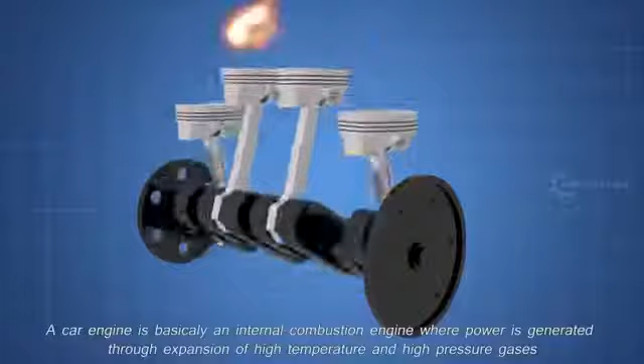A car engine is basically an internal combustion engine where power is generated through expansion of high temperature and high pressure gases. A lot of heat is generated due to the combustion gas and friction of mechanical parts. For sustained operation, this excess heat should be removed from the engine and kept at operating temperature.

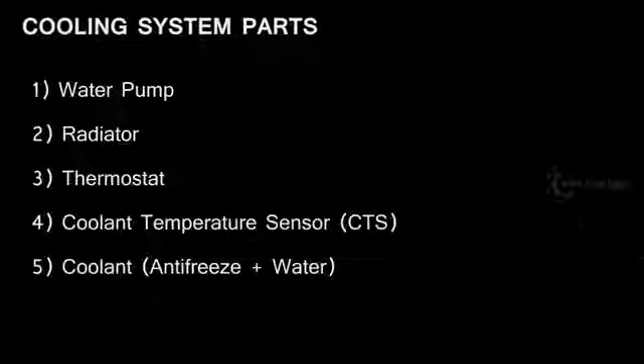Now let's see the parts involved in cooling the engine. The main parts for cooling the engine are water pump, radiator, thermostat, coolant temperature sensor, and coolant.

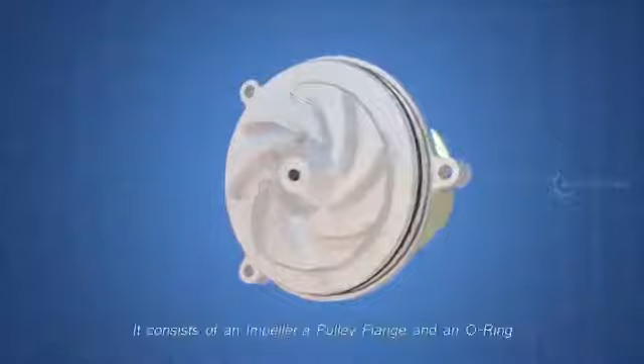First, the water pump. The water pump is the heart of the cooling system, which pumps the coolant. It consists of an impeller, a pulley flange, and an O-ring. The impeller is driven by the engine drive belt through a pulley.

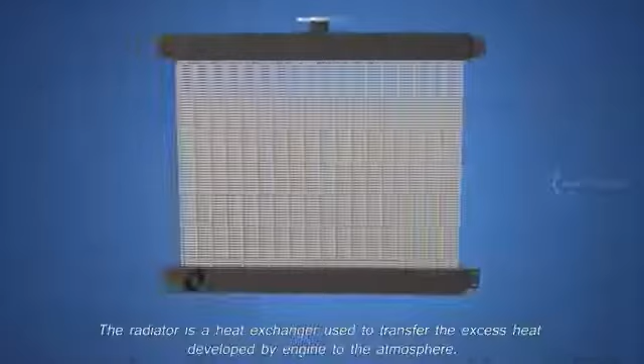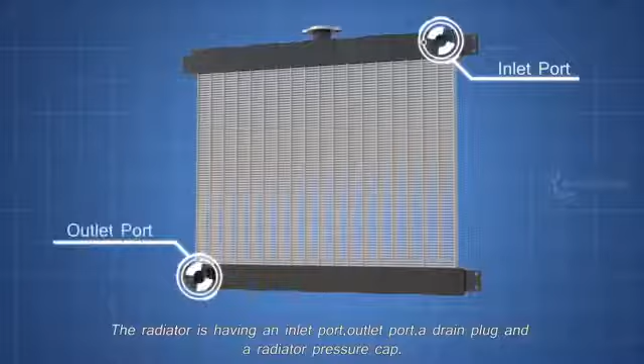Next, the radiator. The radiator is a heat exchanger used to transfer the excess heat developed by the engine to the atmosphere. The radiator has an inlet port, outlet port, a drain plug, and a radiator pressure cap. The radiator pressure cap plays a vital role in the cooling system, which will be explained later.

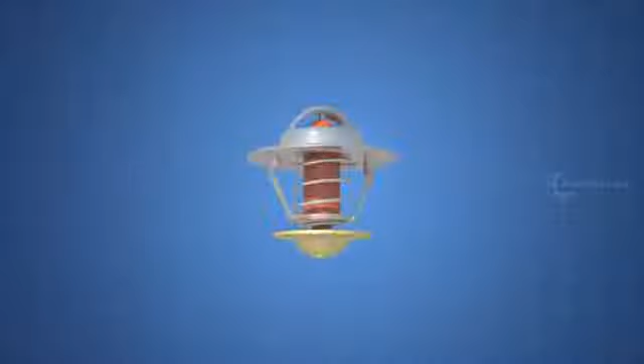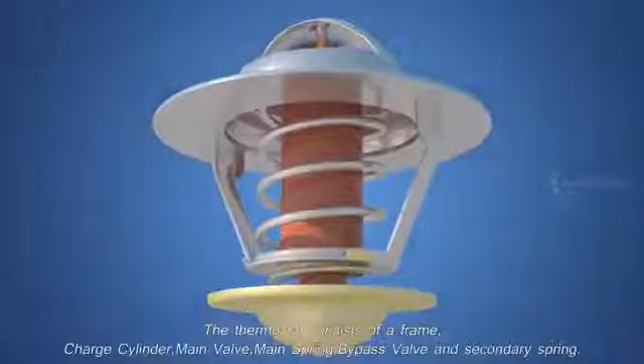Next, the thermostat. The thermostat is a valve which regulates the flow of the coolant and helps maintain the proper operating temperature for the engine. The thermostat consists of a frame, charge cylinder, main valve, main spring, bypass valve, and secondary spring.

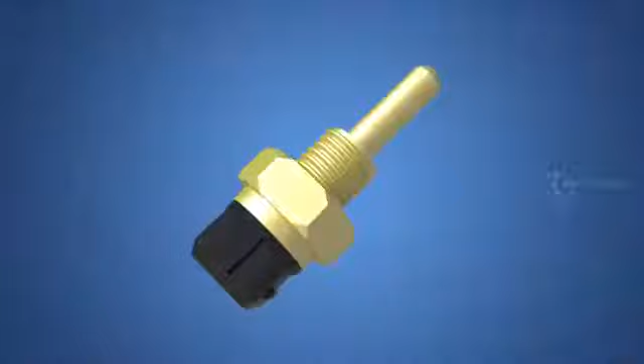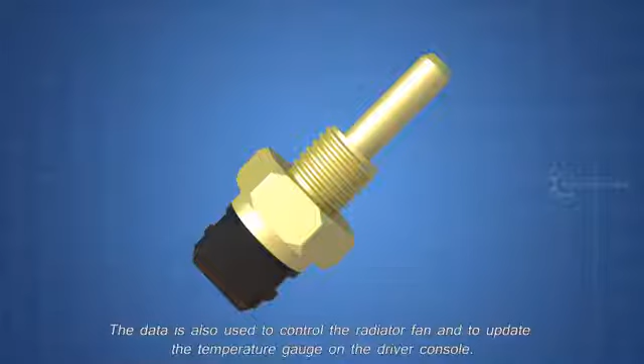Next, the coolant temperature sensor. The coolant temperature sensor is used to monitor the engine temperature. The ECU uses this data to manage fuel injection and ignition timing. Some engines have more than one coolant temperature sensor. The data is also used to control the radiator fan and to update the temperature gauge on the driver console.

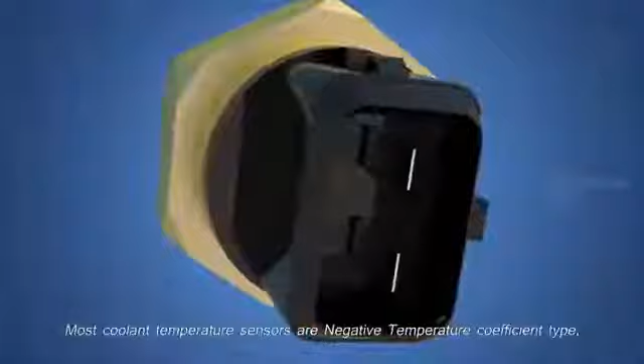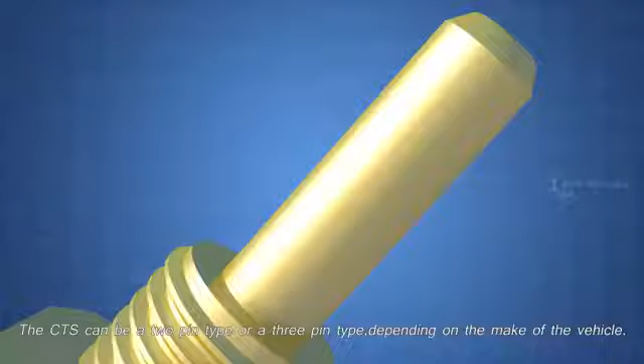The coolant temperature sensor consists of a sensing probe and an electrical connector. Most coolant temperature sensors are negative temperature coefficient type, meaning as temperature increases, resistance decreases. The CTS can be a 2-pin type or a 3-pin type, depending on the make of the vehicle.

These are the main parts involved in an engine cooling system. Now, let's see how these parts work together.

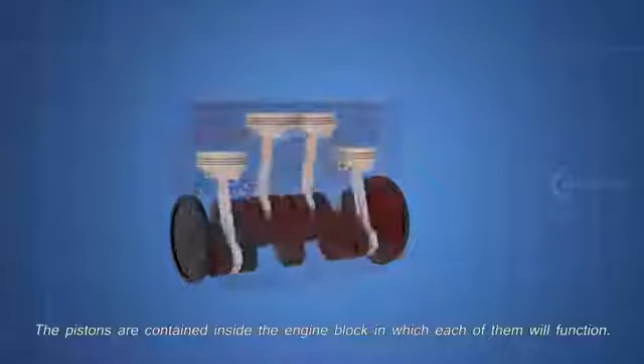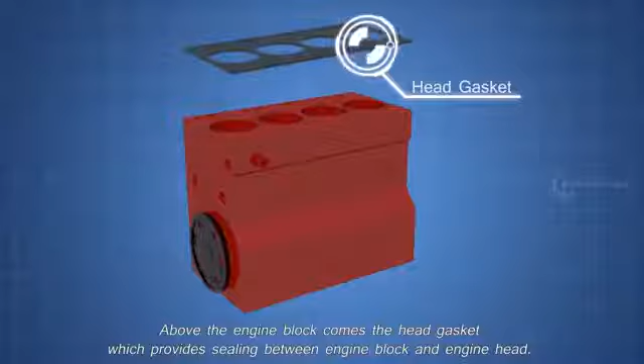The pistons are contained inside the engine block, in which each of them will function. Above the engine block comes the head gasket, which provides sealing between the engine block and engine head. It avoids compression leaks and oil or coolant leaks into the cylinders.

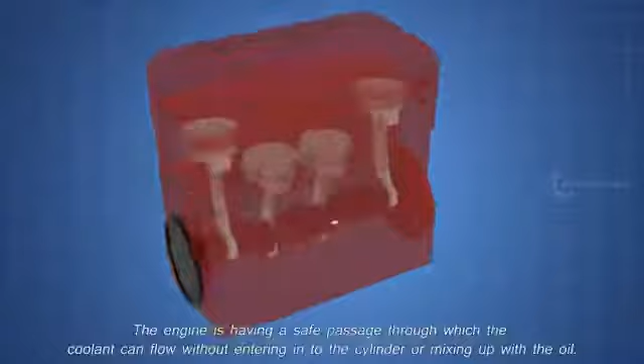Above that comes the engine head. The engine has a safe passage through which coolant can flow without entering the cylinder or mixing with the oil. This passage is known as the water jacket.

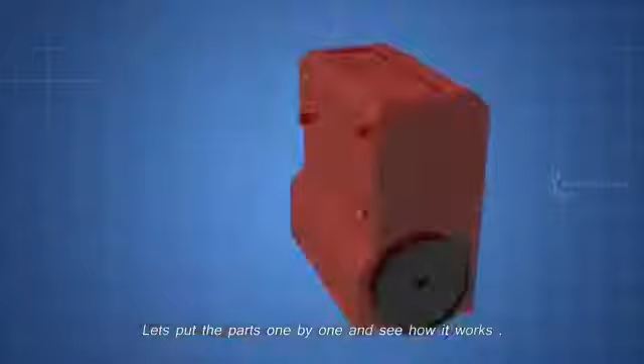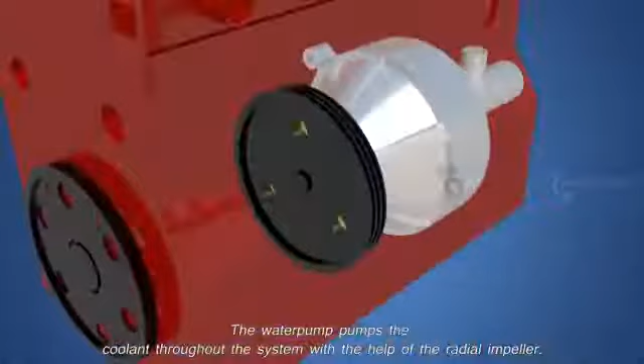Let's put the parts one by one and see how it works. The water pump pumps the coolant throughout the system with the help of the radial impeller. It is driven by the engine itself, using a serpentine belt. The serpentine belt also drives the power steering pump, alternator, and AC compressor, but for now only the water pump is shown.

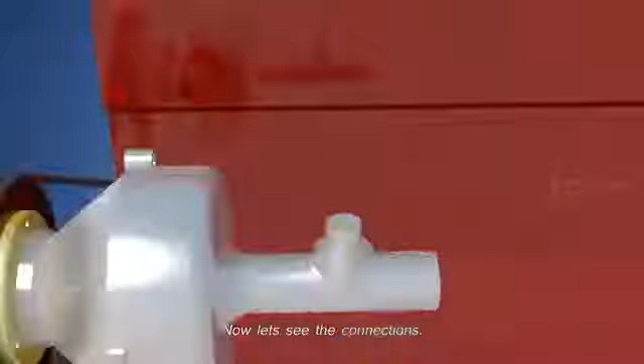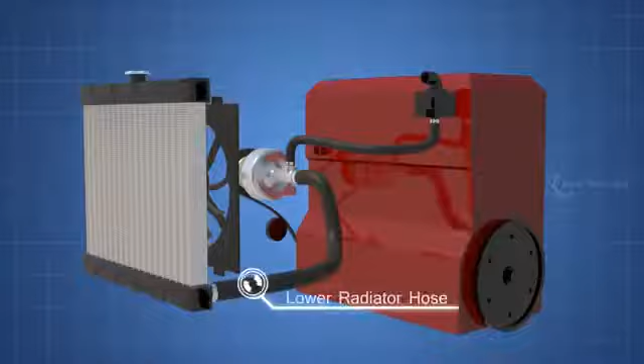Now let's see the connections: the thermostat bypass hose, the thermostat housing, inside the thermostat, the radiator and the radiator fan, the lower radiator hose, the water pump outlet hose, the upper radiator hose, the coolant expansion tank, the expansion bleed hose, and the coolant overflow hose. So, finally, let's get into the working, starting with the thermostat.

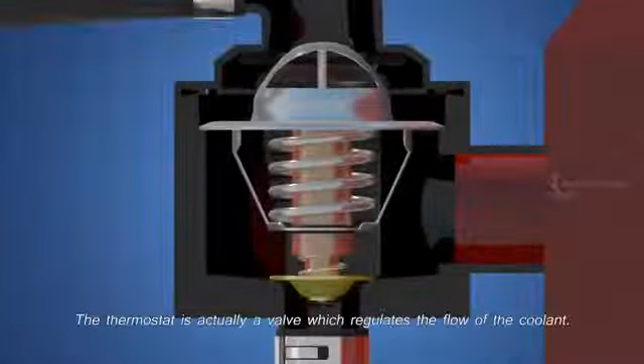The thermostat is actually a valve which regulates the flow of the coolant. It will always be covered in coolant, so that the temperature can be sensed. Let's start the operation from a cold engine.

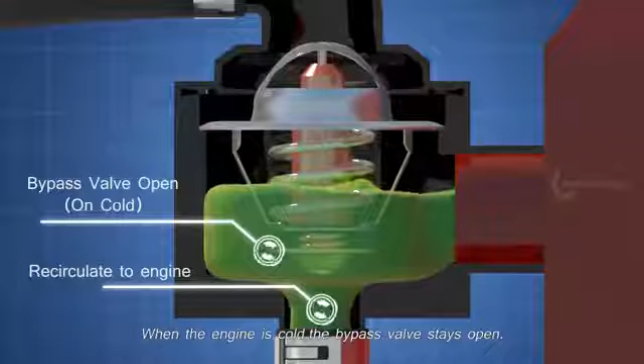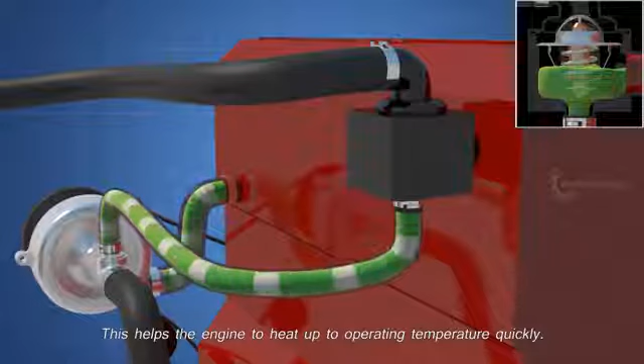When the engine is cold, the bypass valve stays open, so the coolant bypasses the radiator and recirculates through the engine. This helps the engine heat up to operating temperature quickly. Eventually, the coolant temperature increases by absorbing heat from the engine.

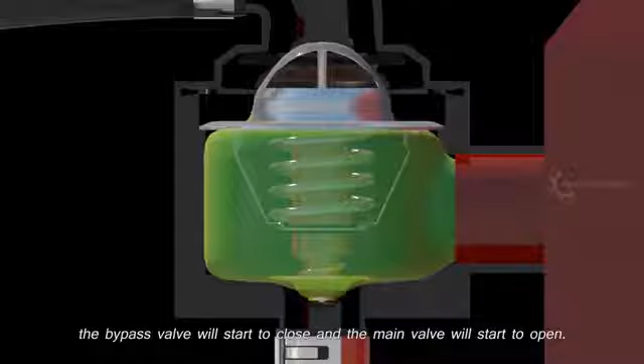Once the coolant starts to reach a higher temperature, usually between 160 to 190 Fahrenheit, the bypass valve will start to close and the main valve will start to open. This allows cold coolant from the radiator to flow to the engine side, and hot coolant from the engine side to flow to the radiator. In most cars, the coolant temperature sensor is located near the thermostat housing.

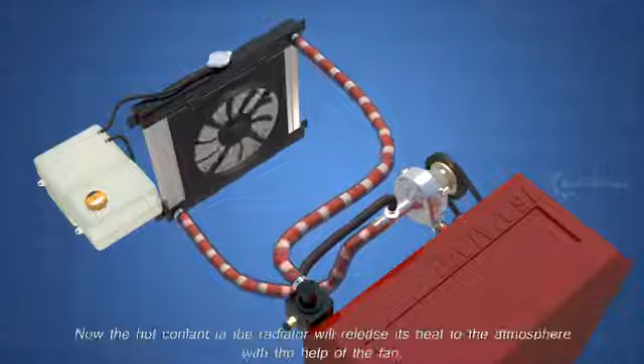It will turn on the radiator fan if the coolant going to the radiator side is at high temperature. Now, the hot coolant in the radiator will release its heat to the atmosphere with the help of the fan. At the same time, the cold coolant received from the radiator will start to absorb heat from the engine for the next cycle.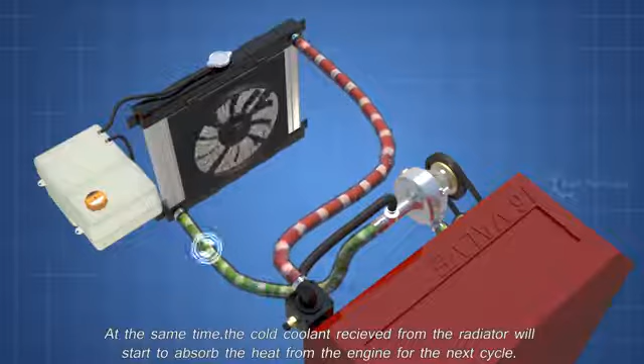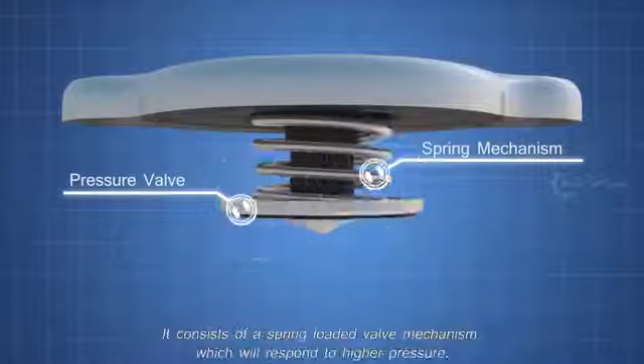Heating liquid inside a closed system always builds up pressure. So how to maintain the pressure? Here comes the role of the radiator pressure cap. It consists of a spring-loaded valve mechanism which responds to higher pressure.

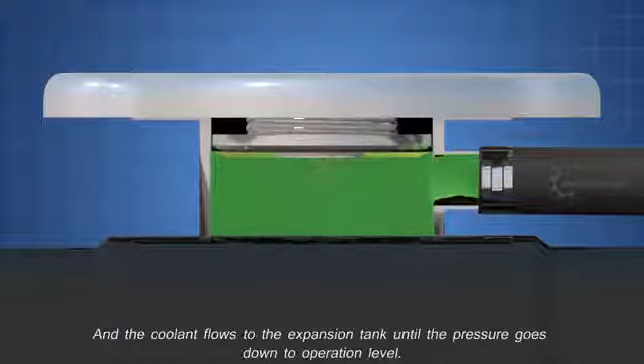Reaching a pressure above 15 psi will push the pressure cap valve, and coolant flows to the expansion tank until the pressure goes down to operation level. When the system cools down, the vacuum inside the system sucks back the coolant from the expansion tank.

In case there is too much pressure buildup in the system, due to trapped air or other failures, the coolant in the expansion tank will be pushed out through the overflow hose.

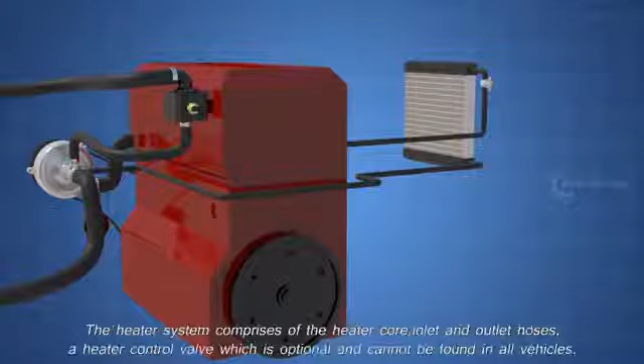The car heater system is a part of the engine cooling system. The heater system comprises the heater core, inlet and outlet hoses, and a heater control valve, which is optional and cannot be found in all vehicles. The heater core acts as a radiator, dissipating heat from the hot coolant to the vehicle interior, using a blower.